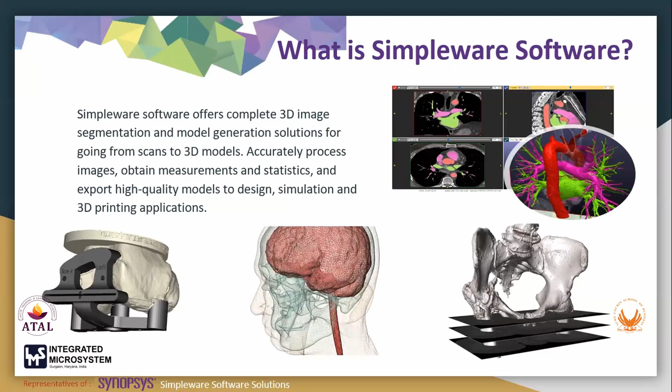So we can do 3D reconstruction of any sample available with us. We can do various sets of simulations like computational fluid dynamics, finite element modeling. We can do normal porosity analysis also, as well as particle analysis, and many more measurement operations we can perform. Apart from that, we can also do meshing here — there is a major part here. We can do meshing of any sample data we have available with us.

Moving forward, what is 3D image processing and why is it necessary, and how we can get benefit from this Synopsys Simpleware software technology. So basically, we have taken a CT dataset of a manufacturing sample.

For example, we have a rock sample. The workflow will be like: we have taken the scan, we will process the dataset. Once the dataset is processed, we will bring it into Simpleware. We have three 2D viewers available with us and one 3D viewer. We have slices in X, Y, and X, Z axis available in 2D views. Whenever we do a 3D reconstruction of a stack of images, it gives us slices in the 2D viewers, and one volume rendering, which is a 3D volume rendering available with us.

In the first interface, after importing the dataset, we move on to the pre-processing and then segmentation part. And after that, we move forward into the machine modeling and analysis part.

Moving forward to the application areas available in Synopsys Simpleware software. We have this software for utilization in the material field, as well as applications in the medical field. Since this session is more focused on manufacturing and materials, I'll be discussing the additive manufacturing part more.

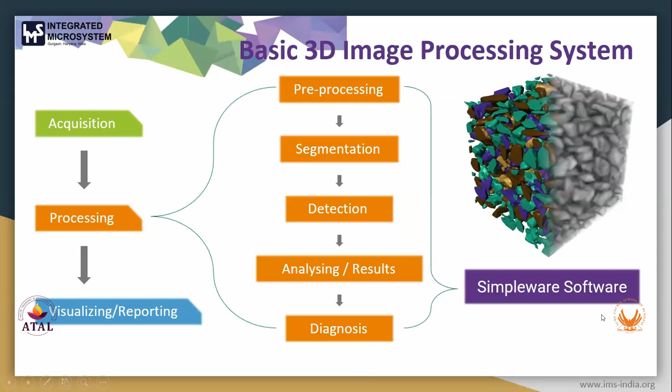So why is image-based modeling basically necessary? Image-based modeling is adopted by many technologies. In many fields, it is adopted to do the 3D imaging of any surface, any anatomical part, rock structures, or any materials, nanomaterials. So we can see the internal features. For example, if a material has any composites available, we can achieve that and visualize it using this 3D imaging technology.

So it will basically reveal, as I've said, the internal features as well as external features. Internal features are more important here in the software, and we can work on industrial as well as medical datasets. For medical datasets, we have this DICOM import capability available, and for industrial, we have this DICONDE dataset import capability.

After this, we have the capabilities of finite element analysis and computational fluid dynamics analysis to do such kinds of simulations. It has many export capabilities to export into various FE solvers, CFD solvers, so we can export it as per our need, and we can go for 3D printing also.

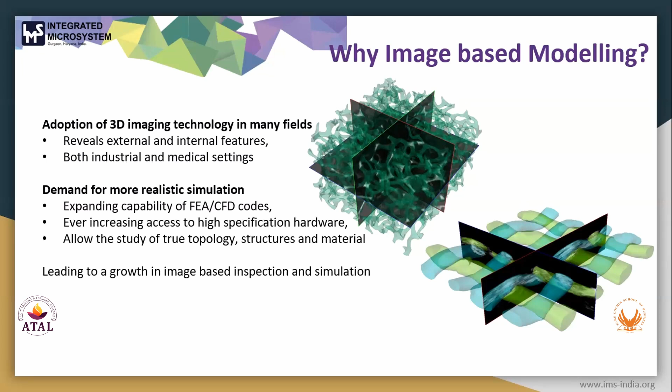Moving forward, how does 3D image processing work in different parts? As I've told you, first we have to import the dataset. After import, we have this segmentation processing available. If you are going for mechanics, then we have measurement and analysis available. After everything, we have model generation available, and we can also do the 3D image.

So basically, import we have done. After importing, we have this visualization option available. After that, we have segmentation, and we can do measurement. Then after model generation, if we want to do any integration, that too is also done here.

After that, it also has options available in scripting. We have log options available here. We can select all the logs and convert them into Python codes to do the automation.

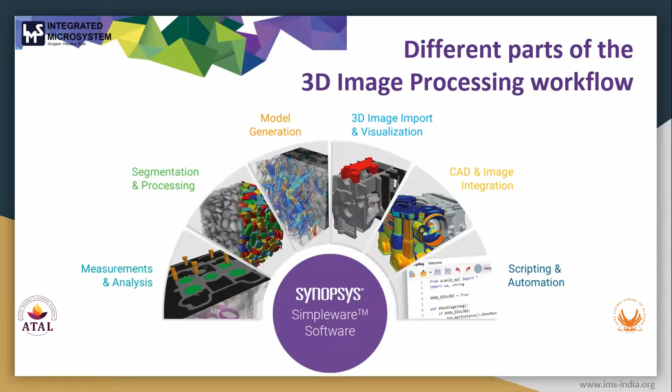Moving forward to the workflow here, as we have seen earlier, image import and visualization is the first part. This is the first interface of the software after importing. We have three 2D viewers and one 3D rendering option available here. 3D volume rendering is available here.

So it is an auxetic foam. What you are seeing here is the 2D images of this auxetic foam, and this is the 3D image. It is available in the XY axis, ZX axis, and YZ axis. It has various kinds of tools available here. For image processing, we can go here, and we have other options available.

We can drag and drop such a mask that we create to do the model generation, to do the analysis. We have four types of model generation available here: surface model generation, finite element model generation, computational fluid dynamics model generation, and NURBS model generation, that is non-uniform rational B-splines.

As I've told you, these are the import capabilities available here: MRI, CT scan, micro CT scan, SEM, 2D image stacks, raw images. Basically it is a rendering software, so we need a GPU to do such visualizations or rendering. The process will be like image import and visualization, then segmentation processing, then measurement and analysis, then CAD and image integration, model generation, and then script and automation.

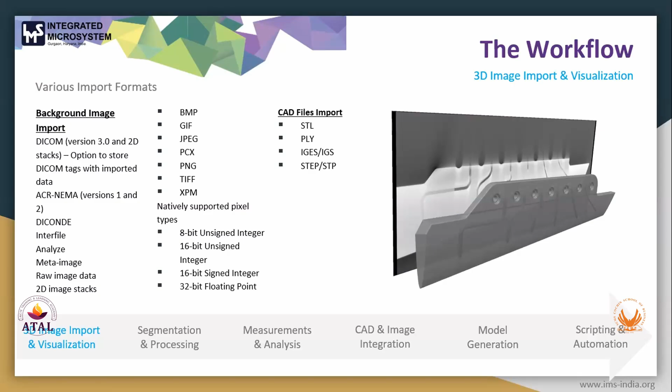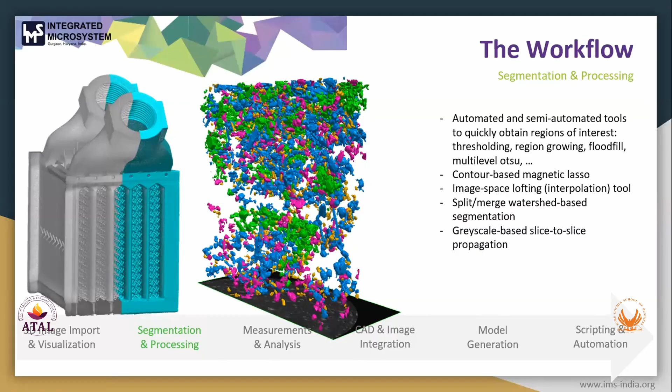Moving forward to the workflow, how the workflow will be here. You can see the segmented part here, it is the color coded part available. As I've told you, it has three types of segmentation tools available: first is fully manual segmentation, then we have semi-automated segmentation, then we have fully automated segmentation available.

So we can do fully manual work here. If you are working on an important data set, you can use various tools available here, and it will help you accurately segment your data set with the help of manual tools.

Moving forward, it basically has various statistics frameworks available here, and we can generate templates here. We can do center line creation. We can also generate cross-sectional area and cross-sectional lines here, and we can generate metrics for pores analysis and particle analysis, as we have told you, all can be done with this software.

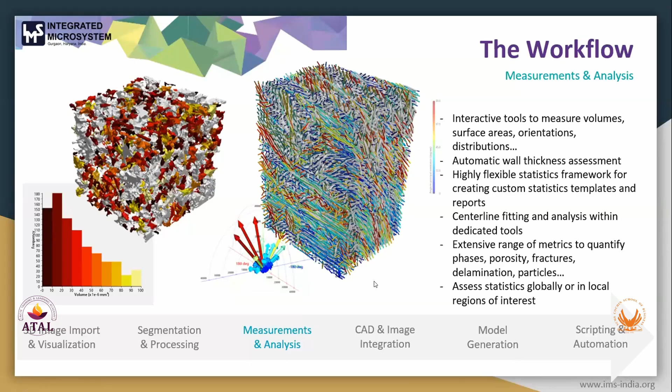Moving forward, after this, if you want to upload any CAD file, it has options available to upload the CAD file. We can upload the STL file, and we have IGS and then STEP, and it also has align options available to align the data set.

We have landmark registration tools available to align some data sets. For example, if we have imported a data set and we want to upload its CAD file also, we can use this CAD import option and other landmark registration options to align these two.

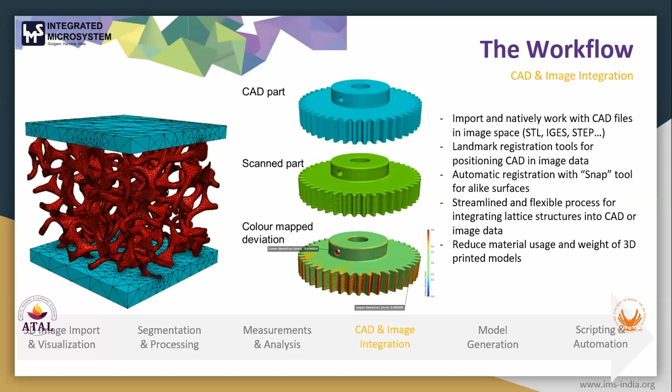We can have very efficient data and metrics given to us with the help of landmark registration, and we can import such kinds of files. Moving forward to the topology preserving smoothing, we have various kinds of filters available here.

As well as in model generation, we have some filters available. We can do, in additive manufacturing, the watertight STL for multi-part surfaces. So we can do watertight analysis here, and if we are working on additive manufacturing, it has supported tools available here.

If we are working on model generation, we can set the coarseness values. We have this mesh quality checking tool, and we can fix it if we found any defect in our mesh quality, with single operations. So everything in the software works in single click operations - we don't have to do any complex operations here.

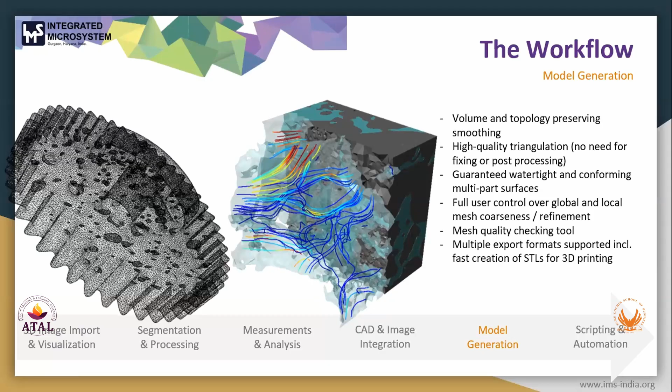Moving forward to the export formats - first we studied about the import formats. Then it has export formats available here: ANSYS, Abaqus, LS-DYNA, and then we have VTK available, COMSOL, Nastran. So for different kinds of models - if you're working on an FE model, it has Abaqus, Adina, ANSYS, LS-DYNA. If you're working on CFD, these are basically solvers for FE, CFD. So you can directly export it into that.

It has one more feature available here, that is direct integration with SolidWorks. So it can directly integrate with SolidWorks for its import and export capabilities. This will remove the manual work of importing and exporting - it can work with the integration.

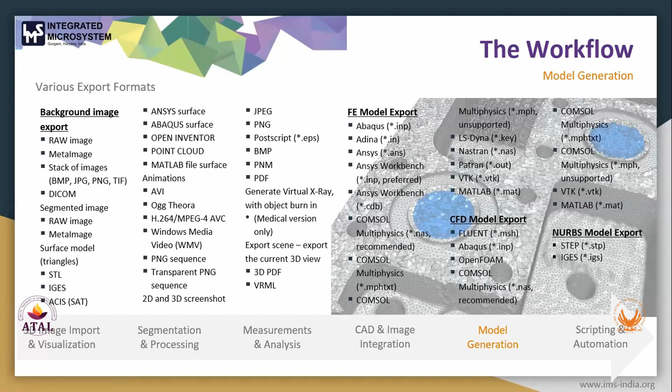Moving forward to the workflow, how scripting will be done here. In scripting, we have log tools available. Whatever we do, like importing the dataset or doing other operations, we can convert it into Python code and run this to automate our process. If we are working on similar datasets every time, it can reduce the manual process and automate your work. It has API generation available, and a macro record option as well.

What you are seeing here is converting log to script, so we are converting the log. Apart from that, we can use plugins here, and basically it will fully automate the process.

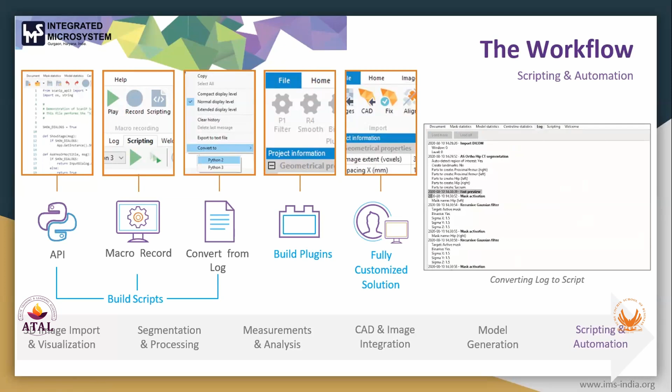So we can see the live demonstration of this 3D image processing using Synopsys Simpleware software. Whatever we have seen in the presentation, we're now going to see in the software. So let me just start the software.

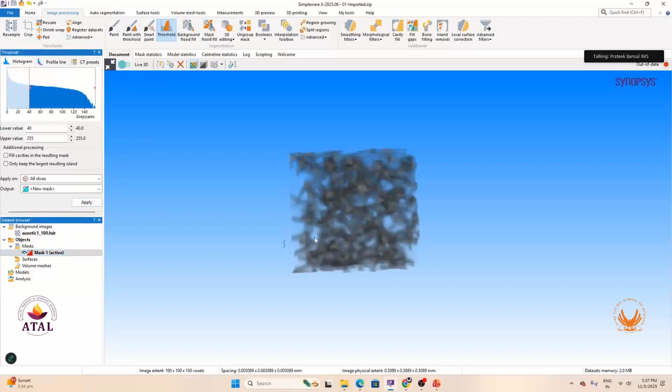So the mask has been generated. To see the mask, I have to click on generate a fast preview. This is a fast preview, but don't consider it low quality, it has a high quality preview option too.

It is set to 10, so it is the high quality preview. I'll click on generate fast preview, and as you can see, it has created a mask out of it.

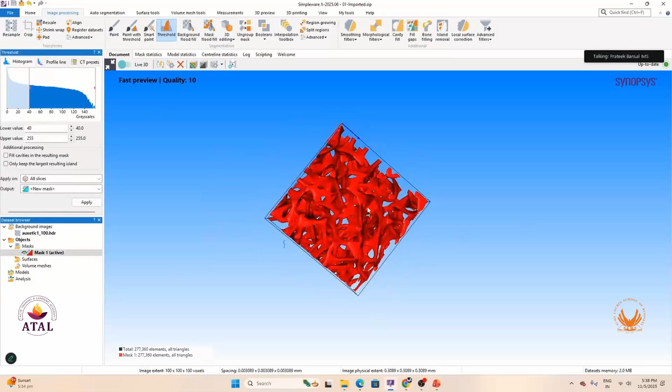So this is our auxetic form. You can achieve the same operation, for example, import.

You can achieve the same operation with the help of this multi-level auto segmentation. For example, I'm opening this, going into Windows C, then program files, Synopsys, Simpleware data, and then the auxetic form. Imported, open.

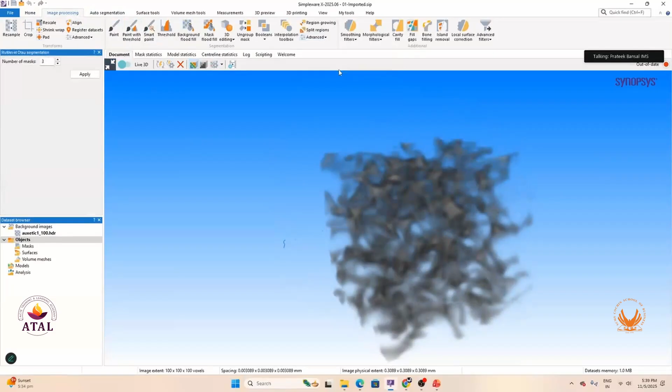So after this, I'll go into this image processing. Let's expand this. So from image processing, I'll go into advanced, and here we have this multi-level auto segmentation. I'll click on this. The number of masks I have to generate, for example, it has selected on 3, you can click on 5. So any number of masks you can generate.

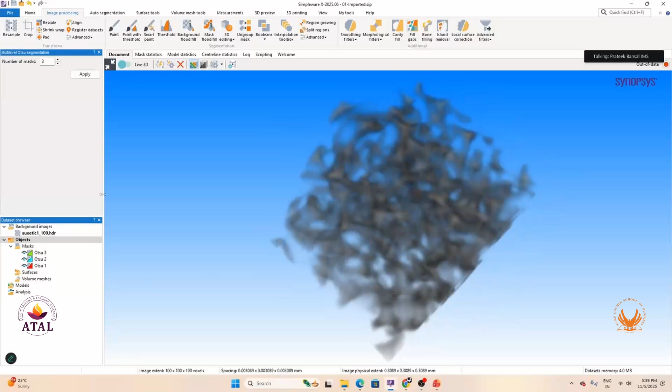So that is how it has efficiently created out the 3 masks out of this. So let's see, currently these 3 are open. So after the multi-level Otsu segmentation, you can see this is what your image looks like. So let's remove the air. After removing the air, you can see these are the masks you have generated. After removing these 2, you get the final product here.

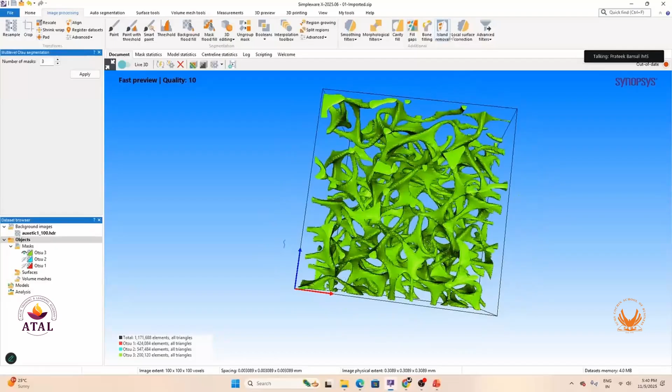And you can go into additional processing, like for example, you can go into bone filling. Currently Otsu 3 is selected, so I'll click on apply. So it will fill any bone that is hollow from inside, or any structure that is non-uniform. After this, let's click on this. So it has generated the full, it has captured the full air.

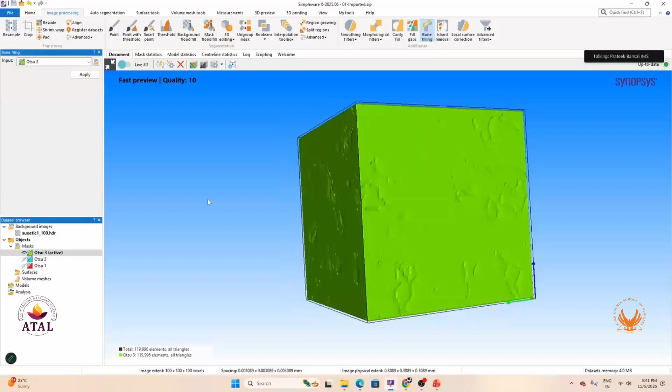So that is how you can achieve this. So you can achieve all the other operations from here, like fill gaps, cavity fill, and you have recursive Gaussian, and all the other things, like local surface correction options available also.

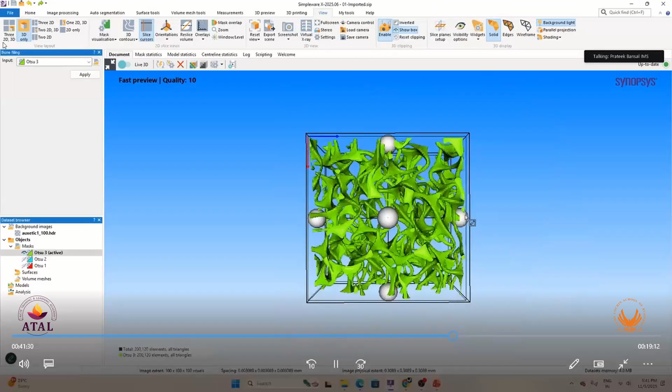From here you have multiple viewing options available. For example, if I go into this enable, and if I do this, so as you can see, you can see any internal structure from this, and you can achieve the same from this in the surface tools.

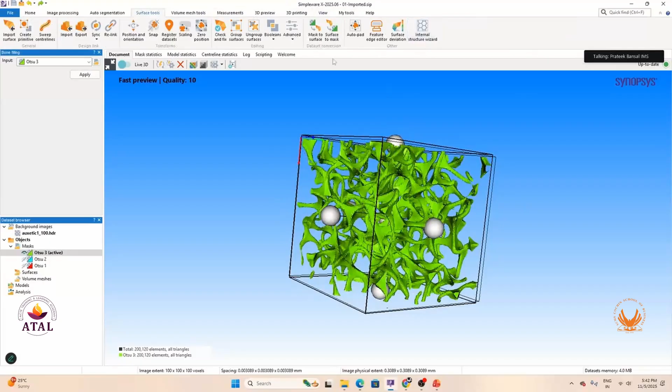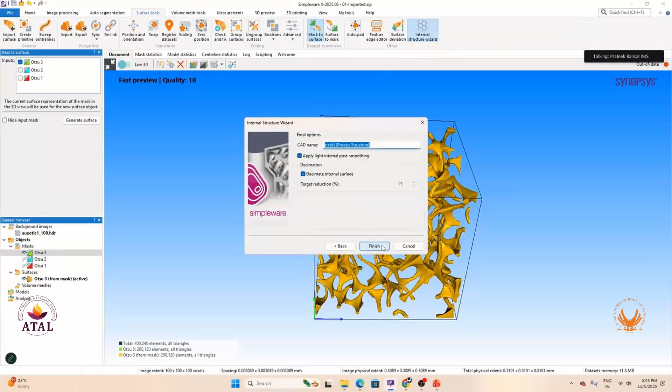We have this internal structure wizard. So for that you have to generate into the mask to surface. So currently it is a mask. So after generation, let's first disable it. So in the surface tools, now if you go into the internal structure wizard, then next you can set the shell value, coarseness values, and cavities value from here, and other modifications available.

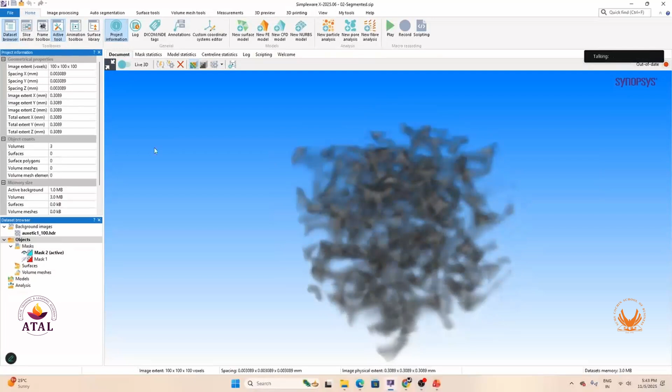Okay, so it has given me some error. Let's wait for it. So I'm opening the data set again. This time I'm opening the segmented data set. I'm going to data, auxetic form, and then segmented. Let's open this. Expand this, and I just have to click on this generate a fast preview.

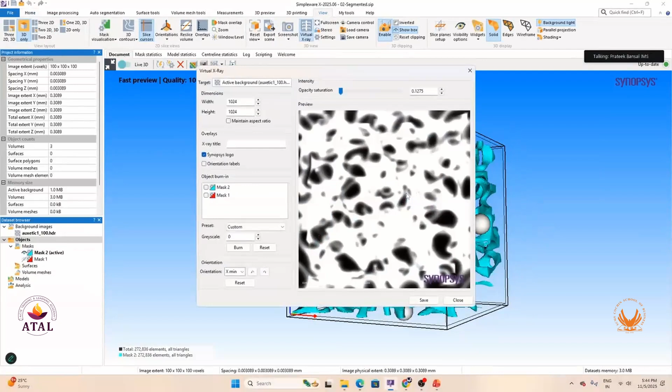So as you can see, it has already been segmented. So I was showing you this. Wait. So you can achieve these operations from here. Even if anytime you want a virtual X-ray, that can be achievable from here.

Disable. And even if you want to go into these measurements to do any measurement operations, for example, if I want to create center lines out of it, currently it is selected, so I'll go into create center lines. Even if I want to do the centreline statistics, I want to see the cross-sectional area here, you can see the cross-sectional area here. So I can achieve various operations from these tool ribbon available.

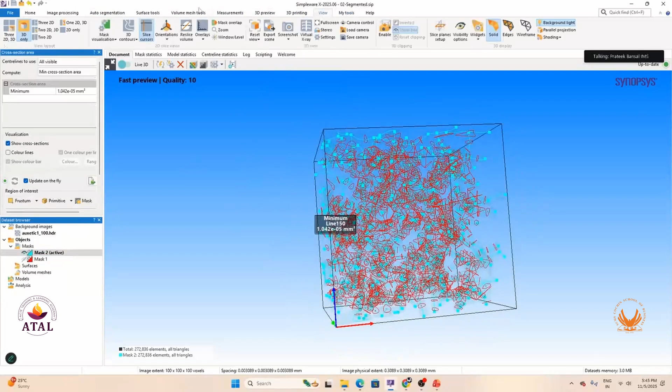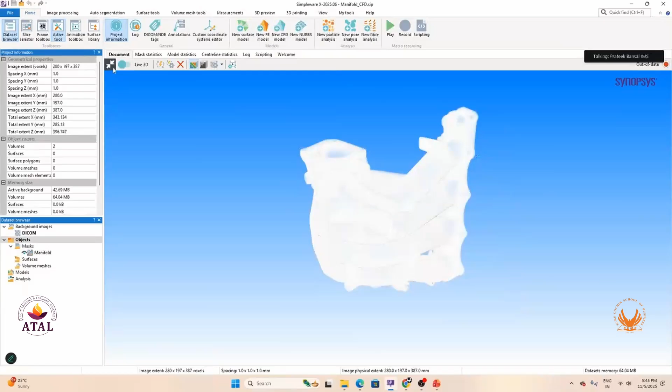I'm opening another example. For example, after auxetic foam, let's open this manifold. I'm opening manifold CFD. As you can see, these are the 3 2D viewers, and this is your volume rendering. Currently it is the volume rendering only. So we're going to segment it out since it is looking like really clean data. We just have to click on the segmentation.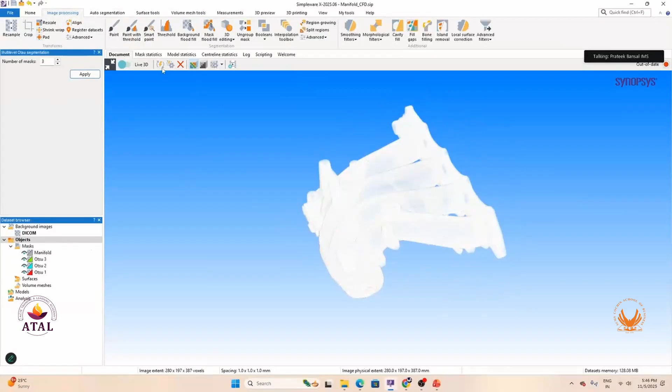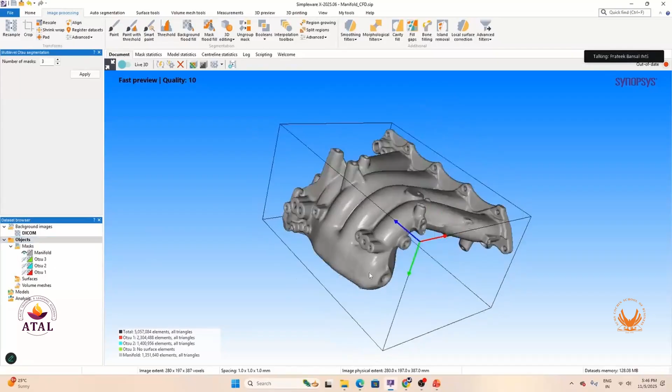So it has created me the mask. I just have to click on generate a fast preview. So it has captured volume, air. So first we remove the air, and then, as you can see, it has generated a manifold.

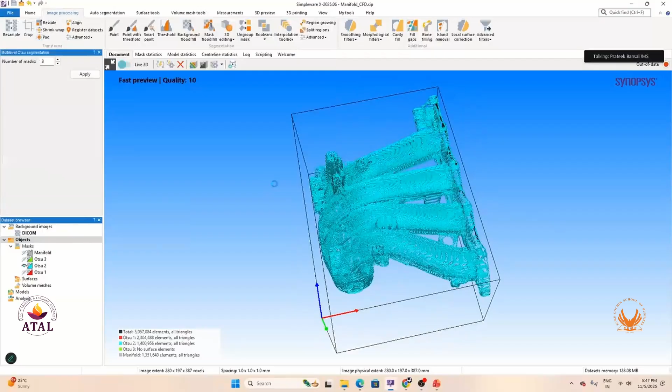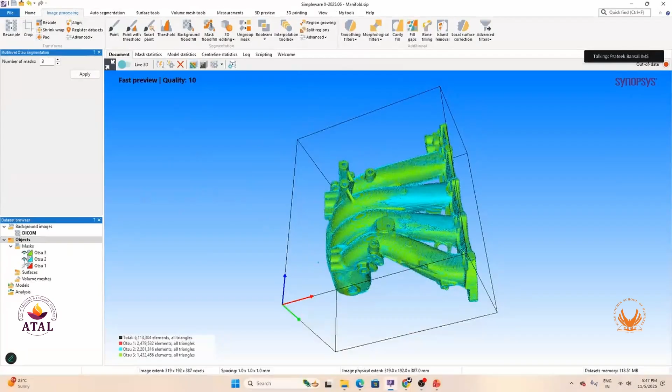And even after that, if you want to achieve any operations from here, like if you can see, here it is not visible. For that I'm opening another example, manifold.sip. Let's open it, and see how we can pre-process. So for that, let's go into, let's remove this. So as you can see, it has some gaps here that are not available here, but as you can see, some gaps are visible here. So you can achieve that, or you can reduce that, there are various operations available here to do that.

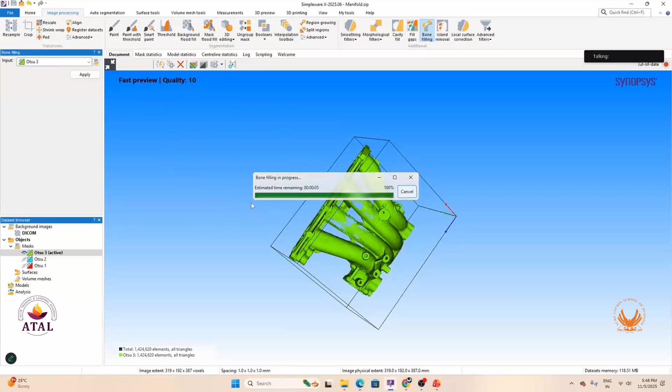You can also use this bone fill filter, and similarly you can achieve it in the 2D viewers. So for example, if any axis you want to work on, you can go into that axis, expand it, and basically correct or paint there. It has given us smart paint tool options. So I'll be doing that in a while. As you can see, it has somehow corrected it.

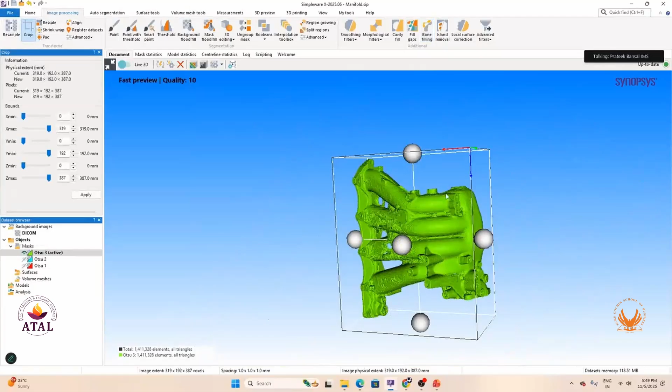Let's talk about pre-processing. For example, if you are using this crop tool, if you want to remove any part, since all the parts are correct here, even if you want to remove any part, you can achieve it from here.

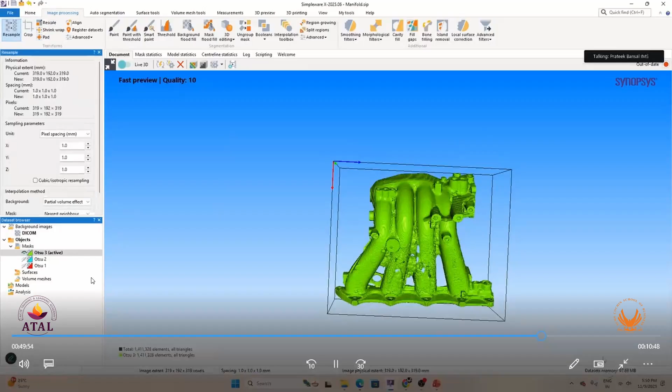From here you can change the physical parameters. Currently it is in percentage, you can put it in pixels. It is a dataset memory of 97 MB. From here you can upsample or downsample. Upsampling will make the quality of this image higher, and the dataset memory will also go higher.

So let's move forward and see how analysis works here. For example, let's do pore analysis. After it, let's go into mask and select the template pore size. As you can see, it has given me all the dataset here. I'll click on this run statistics. It will show me out of date document, so I have to generate a fast preview out of that.

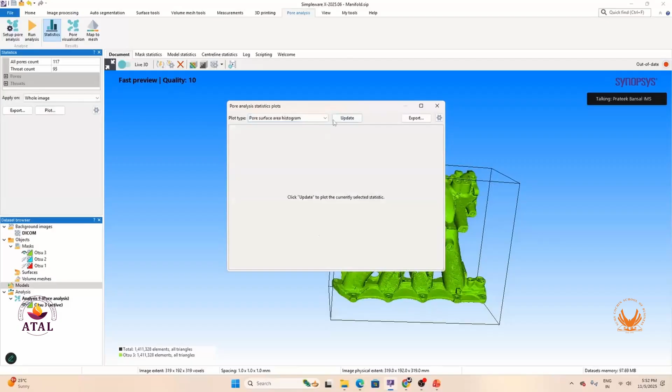Let's just wait for it to complete. It is almost completed, and you can see the plots in the statistics options here. The analysis has been successfully completed, so you can see the plots here. As I was talking about, these are your analysis plots that you can see, and you can export it also.

Moving forward, let's see how model generation works in this Synopsys Simpleware. Let's take an example of manifold itself, manifold CFD. Let's get it imported. As you can see, this is our dataset.

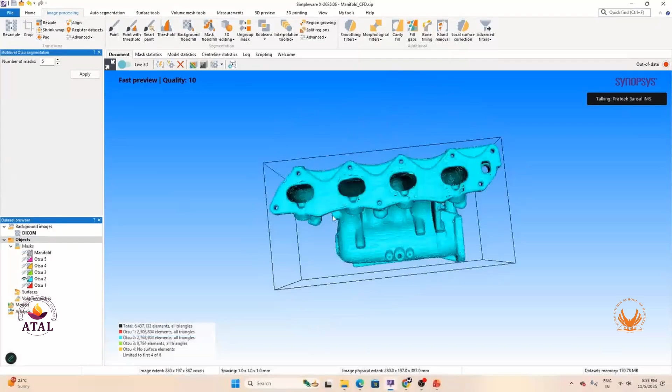We go into multi-level Otsu segmentation. You can do a number of masks, increase the number of masks also. So it has generated me this. I'll remove the air, let's remove the parts also. So it is basically a manifold.

We'll now see how we can achieve this, since I have isolated this, I'm going to drag and drop this into model. I'm going to see how we can create a CFD model out of it.

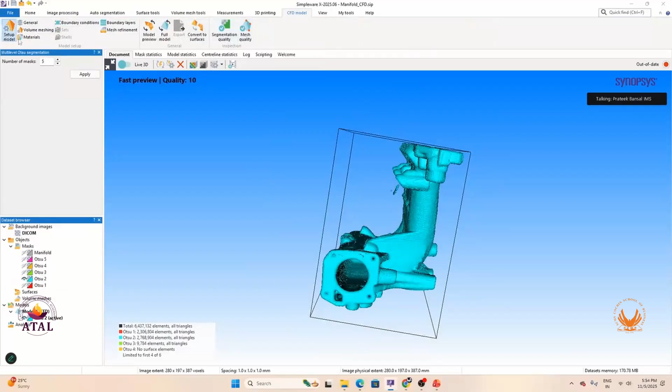For that, it has given me another tool ribbon, and in that I have setup model, and these things will be available in setup model. I have this general option available, model preview is there, full model generation is there, and segmentation quality. We'll see all this. First we'll go into the setup model. Since I have selected the CFD, it has given me all the export formats, and in general it has given me pre-processings, and whether I want to do the smart mask smoothing or not.

After that it has given me the +FE Free and +FE Grid options available. I can't change it here since I'm doing a CFD model generation. I can use this mesh density options that is available here, so I can change its coarseness value, for example, setting it to -30. With more options, I can achieve other modifications here.

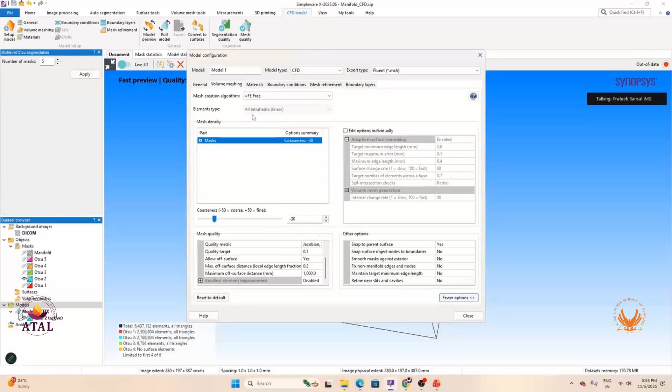In the material, it has given me fluid and solid material type. In the boundary conditions, it has given me the option to add all the possible boundaries. In the mesh refinement, it has given me add or manage regions that will open the mesh refinement region, so it's like that. And boundary layer, it has given me also, so I can click on this to add the boundary layer to the part.

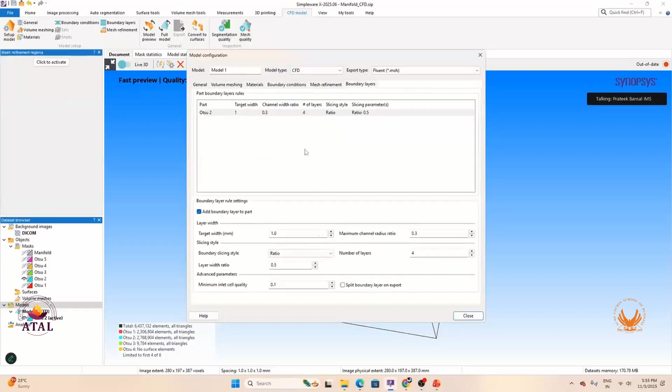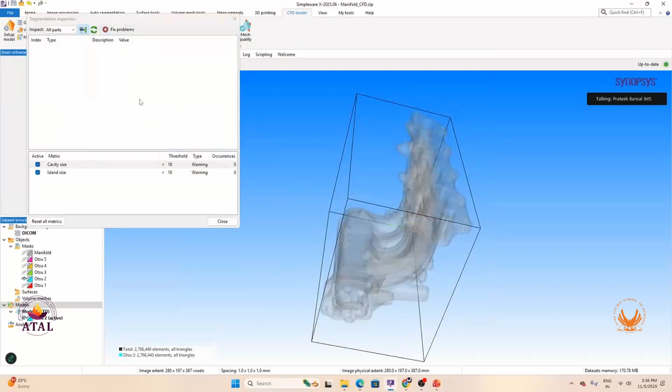After closing it, I'll click on the segmentation quality to check the segmentation quality of it. Since it is giving me a lot of warnings, I can fix these warnings by just clicking on this fix problems. So all problems have been fixed, as you have seen, these are the single click operations available. After closing it, I can go into the model preview, and after all, I can go for the full model generation. So same as the FE, it is showing me 9 steps to create a model out of it.

Here it has given us the tool ribbons available. We have the image processing tools, pre-processing tools, and segmentation tools. This is for manual segmentation. If we go advanced, we'll see multi-level segmentation too, which comes under semi-automated segmentation.

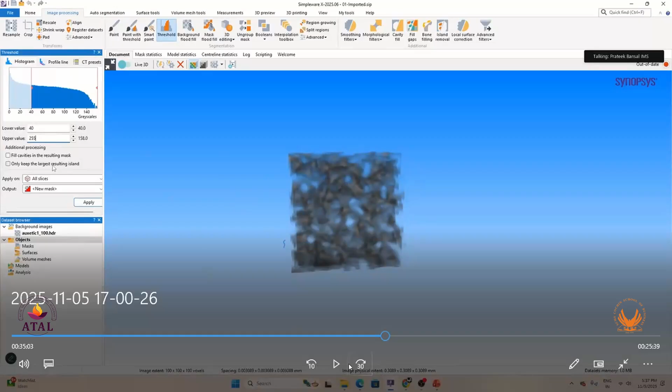So this is the threshold I was talking about. It basically uses the grayscale values, which we can set when working on auxetic foam. The lower value is recommended to be 40 and the upper value at 255. We set these values, and when we generate a preview, it will be a fast preview but of highest quality.

When we generate, it will create a mask out of it, and as you can see, it has created a mask one inside a mask folder. When we want to do modeling or analysis, we just have to drag and drop this. And when we are working on any operation and use any tool, we just have to click on this to make it active.

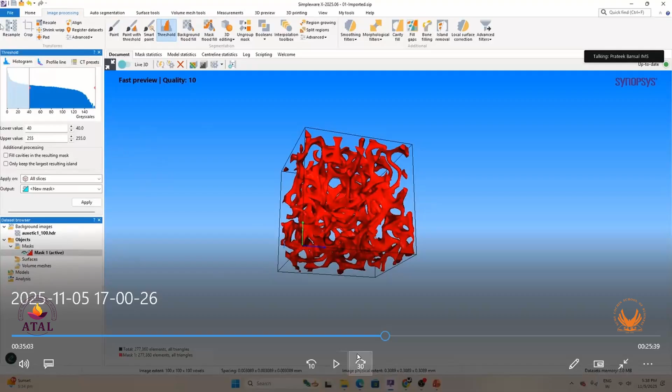And as you can see, since we have done the segmentation here, multi-level segmentation we have done. In this we can create a number of masks, and since we have created three, it has given me three segmented parts or regions. The whole region in red has captured the air available in this region of interest.

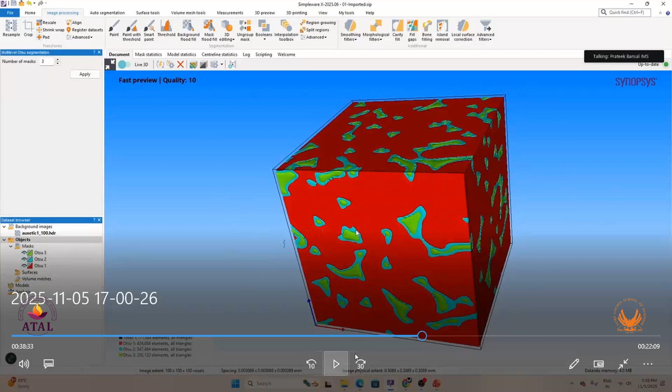We can remove by clicking on this, and we can also remove by isolating any of them, as you can see, this is the segmented part. Since we get our segmented part, we can work on 3D editing if you want to cut any regions or remove any regions, and we can do filtering also here.

After everything, if you want to work on measurements, like creating center lines, cross-sectional area, or some kind of measurements, we can achieve it from here. And after that, if you're working on 3D printing, we can know the structure's capabilities inside this 3D printing, how capable it is for 3D printing or not. So we can achieve it from this 3D printing section.

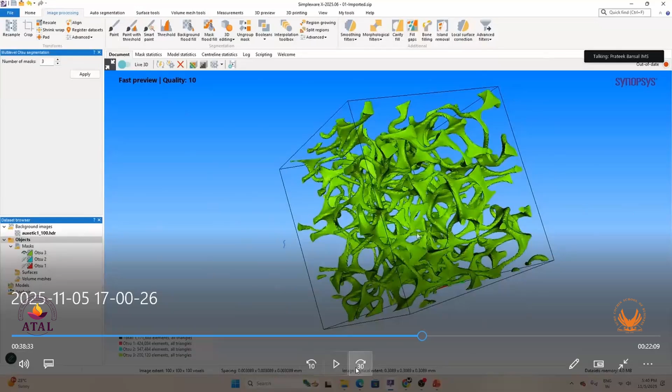And if we are going for model generation, we can just drag and drop, and in 9 steps it will complete. Everything here will be done within one or two single clicks. So it is very user friendly software, and we can achieve modeling from here, analysis from here, and go for 3D printing of any material.

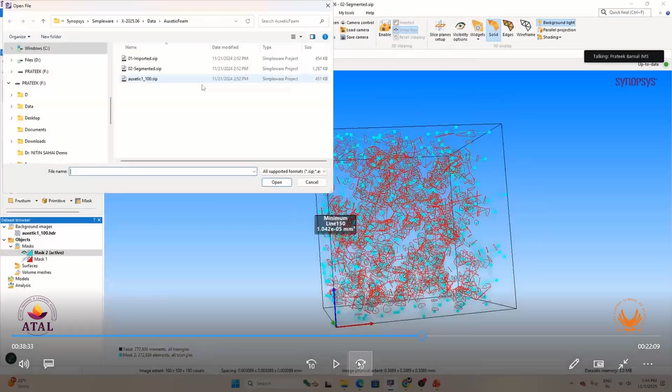As you have seen, the processing is very high since we are working on 3D image data sets, so it needs some processing time. But in the Simpleware software, it is very optimized so that we don't have to sit for hours working in this software. We can work directly, and any operation or simulation running will be very quick. And the quality, as you've seen, is the highest it can give.

If you want to make our data set more efficient, we have this resample tool available to upsample or downsample our images. We have this crop tool available to shorten our region of interest. We have this padding shrink wrap available to uniformly increase or decrease the region of interest. We have this align tool, so if we are working on two masks, we can align the data sets from here.

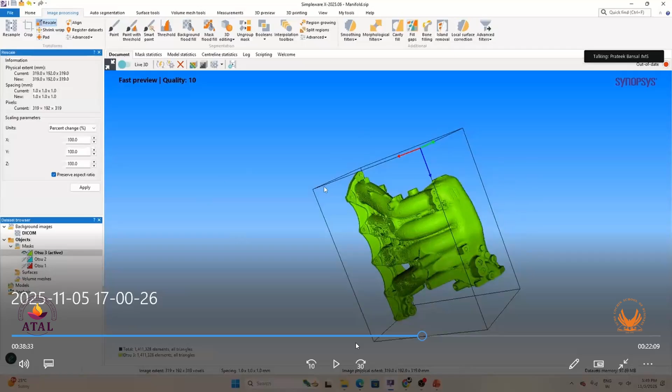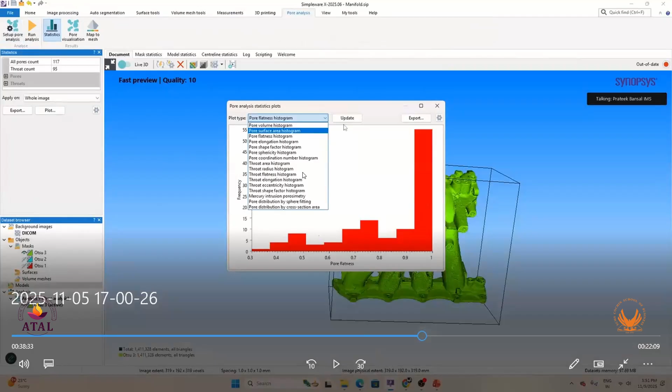So we can do various operations, and here we can do the analysis. Since we have opened only pore analysis here, first we have to load the template, and then we can run the analysis. We can see the plots out of here. As you can see, these are the plots, and there are various kinds of plots you can see: throat elongation histogram, pore shape factor histogram, and various plots here.

If you go for model generation, it gives us various tools and modifications to do, and it also generates segmentation quality and fixes the quality in single clicks. After model preview, we can go for full model generation, and it will create a mesh out of it.

So that is all from my side.

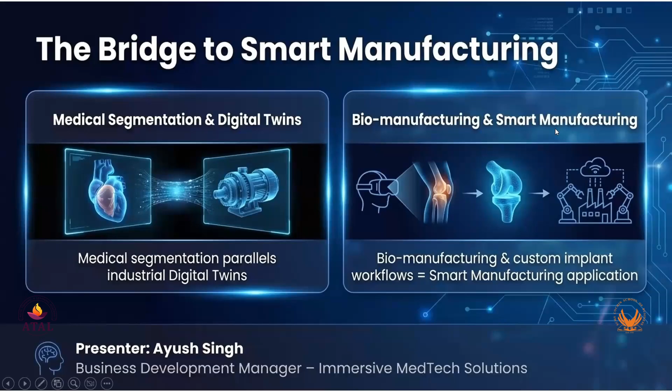Now comes the interface. It looks like a sci-fi movie, but this is real once we are working with any virtual reality software. I'm not just stating this for a specific one, but any virtual reality software, or even the Meta Quest headset. This is the Meta Quest headset that I generally use -- it's a Quest 2 by Meta. It's a very good headset with quite precise accuracy. It has quite good optimization, and it's not just limited to one software -- we can do endless tasks.

So even if someone wants to just have fun, watch any VR-based movies, it's much more immersive than any 3D movie when we are visualizing. So that too can be covered.

For example, any particular video that needs to be checked can be done on a Quest 2 or any other Meta or VR headset. Whenever we are inside the headset, this is how our general overview looks like. Either we can use the controllers, as I had earlier shown, or we can use our hands to navigate between the dataset. It's a free view - we can increase or decrease size, move it further from us, or bring it closer to us.

Then, to optimize any specific particular part, that too can be done, and the optimization is quite seamless. We can move from one page to another, and we can have multiple interfaces open in front of us, so we can do multitasking with ease.

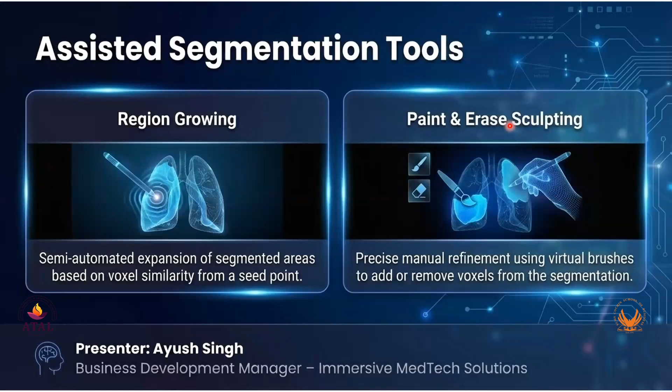This is also very helpful in identifying medical defects, like tumor detection or cancerous cell detection. We can easily highlight that on the basis of grayscale range, and the surgeon will get the specific point of interest, at what point particular work needs to be done and needs to be removed.

The next step is a very important role that we have: real-time VR collaboration. For example, if one radiologist is sitting in Dubai and another is sitting in New Delhi, they can come down in a single virtual environment and do the collaboration. They can give their inputs and also do the particular segmentation.

So we have the global co-editing of models. From any part of the world, you can come into the single virtual environment, discuss the cases, discuss the designs - not just for surgery, but even for smart manufacturing, if we have a design and need it checked by a team sitting in Japan, we can directly call them into our virtual environment. Once we've checked the designs, they can highlight the specific point of interest.

We can also annotate between the models, and we can use voice memos. So there are multiple parts that can be covered.

The next part is cross-sectional analysis. We don't just discard the basics - you can grab a cutting plane and slice through the model dynamically. It's very vital for inspecting internal porosity or verifying wall thickness in the case of additive manufacturing.

For example, if we need to focus on a hypothalamus, we can take the particular range sectional, and then a two-dimensional cross-sectional view can be created, so that whatever model we are making in VR, we need to check its accuracy in the virtual view as well. This cross-sectional analysis plays a crucial role.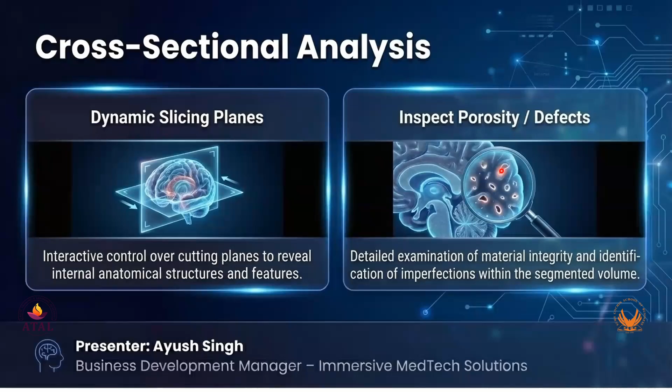The next step is a very important part: 3D sketching and design. For example, if this is a femur we're working on, if we need to draw guides or fixtures directly on the anatomy, that can now be done. We can slice around the data set and do the particular set of designing.

So it goes just beyond segmentation - it also allows us to do particular designing, not just support structures. We have a full set of surface development tools. For example, even if we are designing a cranial implant, that can be done, or if we are designing fittings inside an engine, that too can be designed freely inside the VR view.

Then next up, we have the export capabilities. As mentioned earlier, we have a majority of export formats like STL file, OBJ file, PLY, STEP, IGS - that is initial graphics exchange specification files. Apart from that, we're not just limited to modeling and exporting for additive manufacturing, that is 3D printing, but we also work with finite element analysis and then use it for doing the particular 3D printing.

So we can easily check out the particular thickness value. We can check out any bone sample we are working on, so we can check bone density, and later the particular thing can be exported for doing the 3D printing. The 3D printing plays a crucial role whenever we are identifying the object.

So I do have one such example of a 3D printed model that I created recently. It's an example of patient-specific anatomy. I'll just turn on my camera.

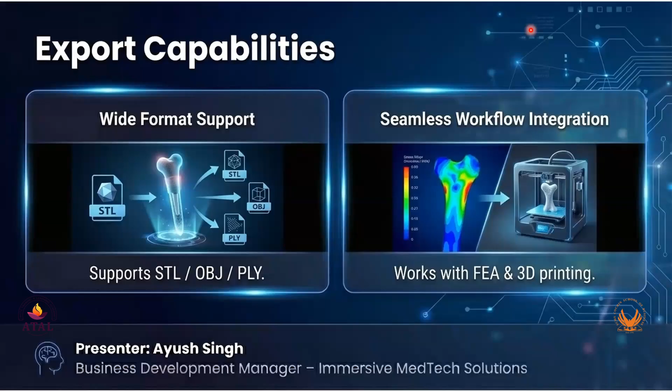So even if we are doing complex industrial designing, that too can be modeled, and small prototypes can be created. Once we are working with the prototypes, we get familiarization with whatever work we are trying to do. And once we are satisfied with the operations performed, we can do the export in any sort of views.

Apart from this, the major concern is what particular algorithms we generally use. So for computer scientists in the room, Elucis manages a hybrid environment. It renders raw voxel, that is volume pixel data set, and generates a polygon mesh in real time.

The particular live mesh that we produce is what makes the interaction so responsive. Once the meshing is produced, we can visualize the data set, and it has real-time meshing. As soon as we load the data set, it generates an automated meshing algorithm, developed on pre-trained data.

The data set is pre-trained on multiple thousands, tens of thousands, of series of CT scans and MRI scans, and thus the ultimate optimization is done to easily render out any data set that we are working on.

The next part is to check out the accuracy validation. Since we are doing faster modeling, we need to check out whether whichever data set we are producing is a proper data set or not, or what sorts of errors can be found.

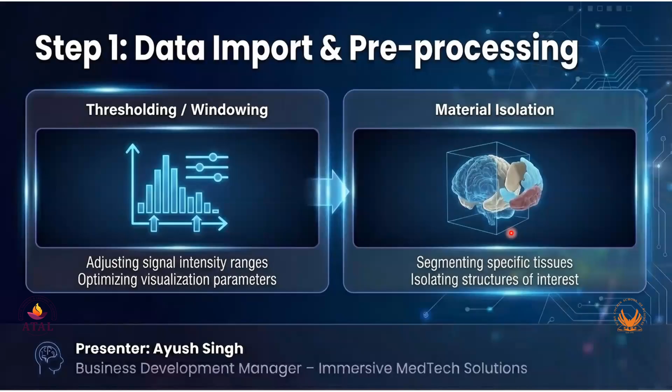Later on, the isolation can be created. We can isolate different structures and label them accordingly. Once labeling is done, taking the example of a pen and its cap, we segment those parts out. Once segmentation is completed, if we only require the pen, we can isolate that part, start working on it, and remove the region that isn't of interest.

The next part is region of interest isolation. We isolate any specific part that needs to be worked on, since a data set may comprise many parts that aren't required for the segmentation. For that, we have region of interest isolation, where we precisely select the target areas and work on the segmentation algorithm accordingly.

Next up, we have manual noise and artifact cleanup. Whatever data set we're working with comprises many metal artifacts—CT samples and micro-CT samples are generally not very clear. There are a lot of noises present, either due to interferences or objects underlying the selected region of interest, which need to be removed and cleaned up before we start the segmentation. That's one such case we work on.

And next, after the manual noise and artifact cleanup, we obtain the data set. Once the data set has been obtained, we use post-processing operations like smoothing up the object for faster processing and faster loading. There are multiple steps required, so the next step is the smoothing and wrapping operation.

So we apply for increasing the surface quality, and lastly we have the particular high quality STL, watertight STL files to be created. Once this is all done, we have optimized our data for the AI and patient-specific implant design.

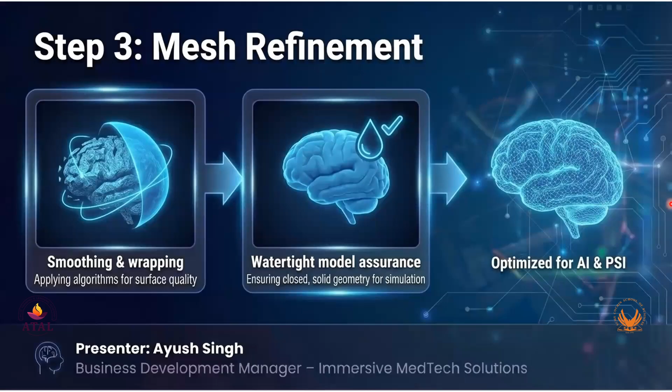Then we can ultimately integrate it with the various UNet models. There are multiple training data sets for UNet models available. We basically integrate in a single pipeline, and later on any sort of analysis can be performed directly, such as computational fluid dynamics or finite element analysis.

Whenever we are training the particular data sets over any UNet model, there is also an important need - why to build a robust AI model. For example, for automated segmentation we need a perfect training data set. All this allows experts to rapidly generate the data set on the ground truth data.

So we directly import any patient-specific data, then we can work on thousands of patient-specific data sets to train better models with better predictive capability. Specifically in biomanufacturing, we can use this for patient-specific implants - we model the defect in VR and print a titanium part that fits perfectly for the particular patient.

Then we also have route optimization. Whenever we have difficulty finding a path to a specific point, we can do that perfectly in VR. We can just navigate between the points, and we can highlight the particular high impact regions present in the data set that we are training for.

This is how a particular net can be easily created - a free form surface mesh can be created. It's very easy to just model. We just need to keep the surface in mind, and the particular model can be created out automatically.

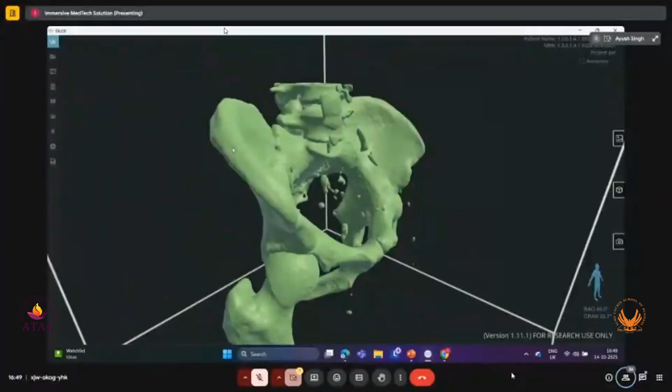We are limited with some features, like we can still do the segmentation and all, but we can just highlight the specific parts. For example, here we can see whatever intersection part is present. So this was a basic segmentation, a direct segmentation that was carried out. This is just for engaging, and if someone needs to put up certain points, that can be done.

If there are multiple objects, we need to move them in the 3D view, that can be carried out. So these are the parts that we have. Then if there are multiple users and they need to connect in a single view, they can just click over here and check the connection. Once the connection is checked, whoever has the same license key can connect and come into a single window, and once all the users are in a single window, they can put in their inputs.

Apart from this, we are also given three methods of recording. We can do a rotational series recording, where we can set the field of view, select the rotational axis, and check how the rotational preview would look. Once done, we can click export and directly do the rotational image series export. Then if we need to do the whole recording of this particular video...

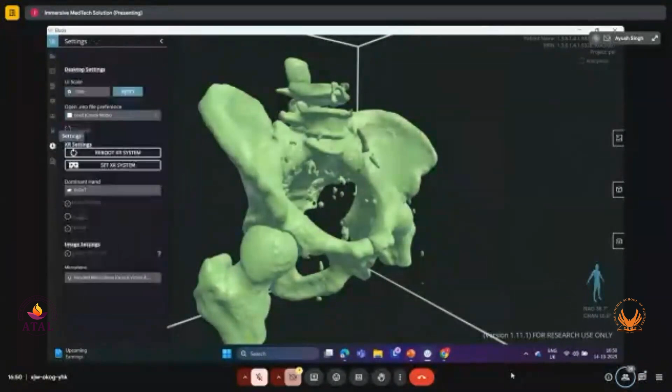For example, if we need to record the whole session, any segmentation part, right from the beginning of the DICOM import to segmentation to modeling, we can click on start video recording and begin. Then, how to work in the software using create mode, which is generally required to efficiently work with the full set of tools present, with no limitations.

I'll just enable my camera. You can see this is the particular VR headset that I have. Here I'll just connect it. Once we go into... hello, just give me a second. Yes sir, you are audible, sir. Hi, sorry.

The DICOM image series, whatever series we have in the particular folder, will get scanned in. Then we need to save the project with whatever name is required. Before that, this is my left controller that I would be using to control the environment.

This is the A and B button that I'll be using, and here is the X and Y. Why it's important is because once I open it in the VR view, we need to get familiarized with the tool, because if we aren't familiarized with it, we won't be able to do the segmentation efficiently.

Apart from that, this particular data set also carries a 4D CT image of the same patient, and that's why it takes time for such data sets to be loaded.

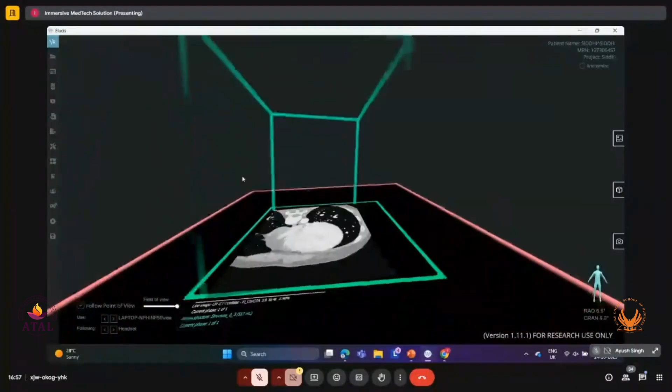I'll just delete the older segmentation so we can start fresh. This is the general view that we get. I'll just click over here, going inside the view.

This is my right controller that I would be using, and this is my left controller. The first and foremost thing we need to do is click the B keystroke on my right controller, and once we click, a lot of tabs come up in front of us. The first thing we need to do is click on this configuration.

We need to select this quick surface, and once that is done, we take a one-hand distance and select the particular window over here. What we have as an option is we can click the trigger on my left controller and hover it around, moving it in any direction, so we can see the data set in any cross section required.

So here we can also rotate it. We have another option to increase the size, so even if we need to see it as a larger window, that can be done. If we need to reduce the size, that can also be done, so it gets fitted into my working window.

Then if we need to move it around this particular window without rotating, that can be selected from here. So we have a controller option over here, through which I can just select out the outputs.

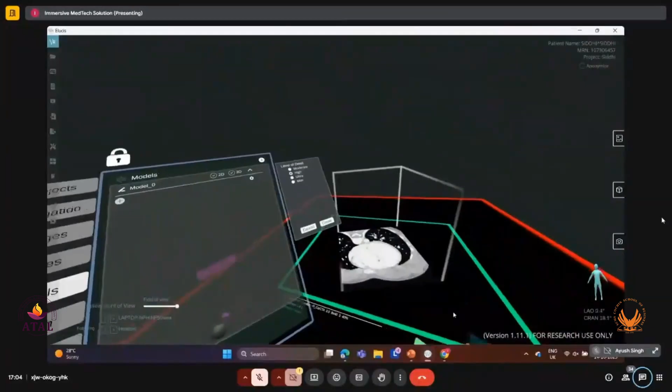One is moderate, one high, ultra, max. We generally prefer using high and ultra to max, because even at ultra it will take time to do the segmentation, and high also creates a good and accurate model. Once we do this, we just need to click on create.

Here we need to toggle on this both 2D and 3D enable. Now one might question that nothing has occurred, we have just clicked on it - yeah, so we haven't done this, we haven't started the segmentation yet. To start the segmentation, we need to click on this A button.

So the pink region that you would be seeing, it might not be that clear in the video, but I can pretty clearly see the particular pink region over here that is getting highlighted. We can select a threshold range, and once that is done, we can start doing the particular sculpting.

So if I move it, pressing my trigger, forward, the brush size decreases. If I move it backwards, the brush size increases. Similarly, if I click this left trigger, the mode of operation changes from addition to subtract.

How it happens is, for example, if I'm doing the particular modeling, I can just click over here, I can select out the parts that I need to model. So we can easily do the particular segmentation, and we can increase the brush size to do it a little bit faster.

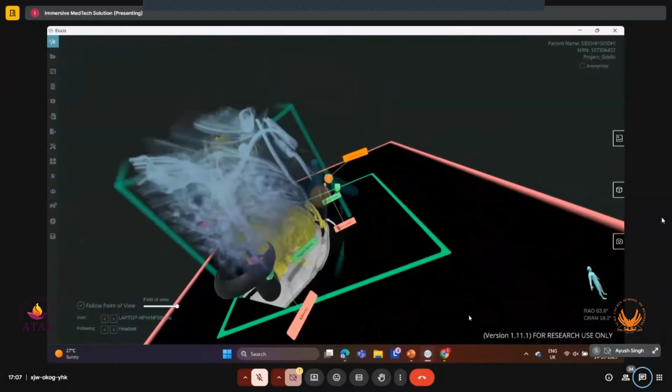So we can do the segmentation in a very efficient way, and it hardly takes around 2 minutes to properly segment out a cardiac anatomy, which is quite difficult while working with the traditional approach. So we can easily select out the part that is not required.

And the same mode of operation can also be done in a desktop version. So even if we aren't very familiar with the VR headset at once, if we need to start the software in the particular desktop version, that too can be done - the segmentation can be carried out.

I generally prefer the VR mode because it's much more time efficient and we can easily do the segmentation. Once we are familiarized with the controls, even a beginner using the software for the first time can easily do the segmentation.

This is how we can remove particular parts, and there are multiple methods to segment this part. We can do a shrink operation, and in this shrink I can reduce the noise present in the dataset, and later on while we are growing the aorta, that can be done.

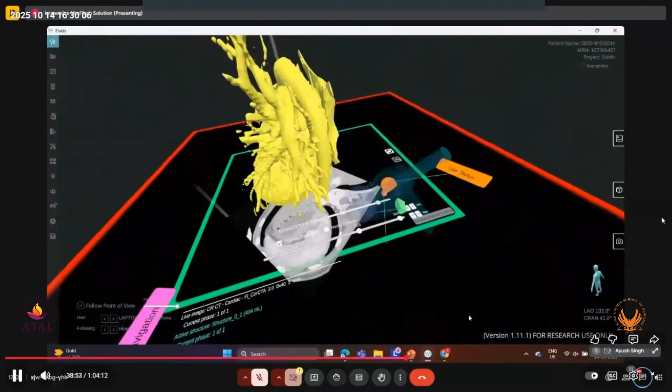That can be further split. So if we need to do a separate segmentation for the aorta, that can also be carried out and further concluded.

So what we do for such cases is use AI-based segmentation. We have AI-enabled segmentation, and once we get a general mapping of the part, we can directly work on it specifically. I'll just select the region, reduce out the precise area, and map it again. This way a particular heart model gets modeled within 2 minutes.

It's a very efficient way. Now whatever part is remaining, for example the aorta openings, I will just click over here. This way any part can be done. And if I need to reduce the noise, I can just click on this single click operation.

All the small noises that were present get removed, and later on the larger ones can be manually removed from here. I'll just select the operation as remove, selecting the operation, selecting the threshold size.

One more option we have is, if it's lying in this particular threshold region, I can just select it out, and then if I change the threshold value and add the particular region, we can directly model the specific part that is required. Here it hardly takes some time to do the segmentation.

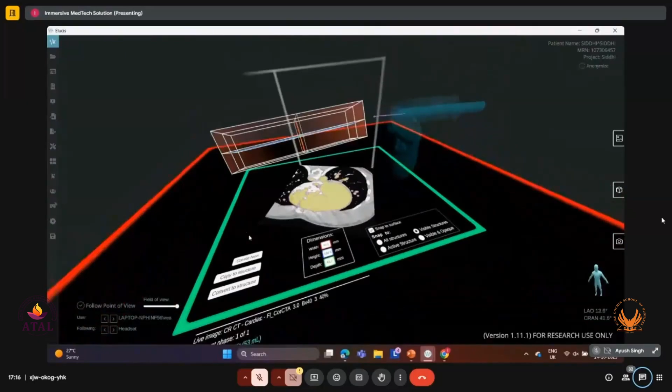And here a particular design can be loaded in, or we can also set it manually. For example, if I require a 55 mm by 100 mm by 80 mm rectangular prism, it can be easily constructed. And if this is satisfying our needs...

What we can do is click on this convert to structure, and it has converted it into this particular structure. Now, if we go into the model, we can also see the converted design objects over here, and we can enable and disable it.

Then if we need to do a particular movement, that can be done, we can set it as movable. Then we can just select it and move it along the particular axis, placing it anywhere that we are required for along the part. So this is the basic design that we can do. I'll just delete it for now.

Apart from this, the best option I look forward to in this is either to create a loop or any tube that we are required. So we can set out a number of control points and create any type of loop we need. Similarly, if we need to remove any point, that can be directly selected and any structure can easily be erased too.

The best tool is the surface tool. We can select n number of control points, and once done, we can map out the surface. So even if we are designing orthopedic parts, that can be done. If we need to design a baffle, that can be carried out. We can easily reduce the dimensions and set it out accordingly to the particular surface.

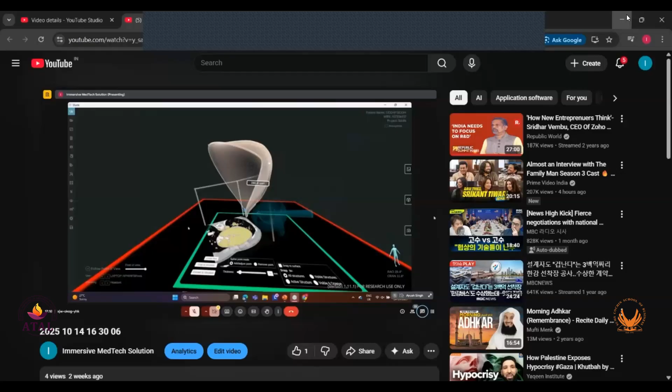Participants, you can unmute your mic and ask the questions if you have any, or you can use chat also. Participants, maybe once they start working, they may have more doubts that naturally Sure, will come. No, yeah, that only. No, when we see the demo, you will not be able to ask many. Once someone starts using, I think they'll have doubt. And you have shared your number also, yes, ma'am. details also. I think maybe they'll contact. Okay. Sure, ma'am. Anyone? Exactly, it's Yeah. a new technology, so it's quite Yes. difficult to Yes. get Yeah. a single glance. So once Yeah. someone starts working, so they will have a better Yeah. idea. Yes. Now they know. Okay, this is existing. They can use it like this. Okay. So once everyone start using, okay, maybe they'll have more doubt and they'll contact you, sir. Yeah, definitely, ma'am. Okay, sir. So Thank you thank so you much so for much, this sir. opportunity, Yeah. ma'am. Yeah. Thank you for inviting, like, no, accepting our invitation. And actually, the demonstration was also very, like, no, well presented and easy to follow. So we truly appreciate your effort and the effort you have taken to prepare this presentation and the demo you have shown. Thank you so much, sir. Thank you. Thank you, ma'am. Thanks for inviting. Thank you, sir. Thank you.